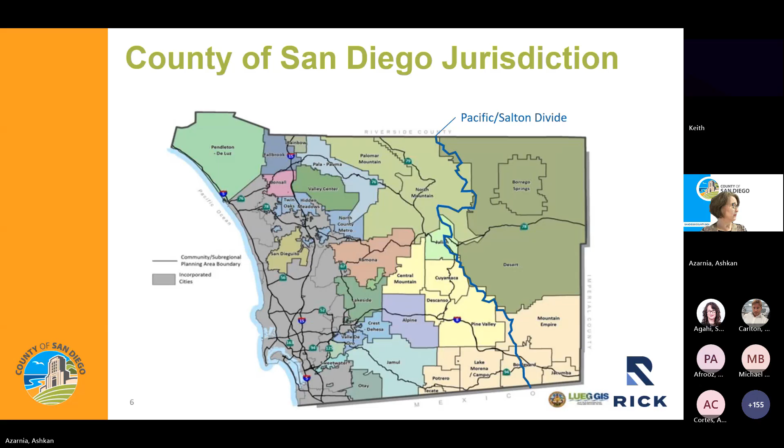Okay. I did want to share a little bit of information about the county board. The county is governed by a 5-member board of supervisors, and the supervisors set priorities, approve the county's operational plan, which is our budget, and set local policy. And the board does appoint commissioners to a flood control district advisory commission, who advises staff on policy, budget. This manual, our commissioners helped review and provided input to this manual.

I want to acknowledge Dr. Mary Yang, the vice president of the Flood Control District Advisory Commission. So thank you for coming, Dr. Yang. The board generally relies on state and federal law to guide flood-related water policy, although the board has adopted

some provisions with respect to private land development projects in mapped floodplains, which are more stringent than the federal minimum. So one example is the 1-foot freeboard. To be clear, the county applies these provisions to our own capital improvement projects as well. So these are the requirements that would govern all development in the unincorporated area, whether that be public or private.

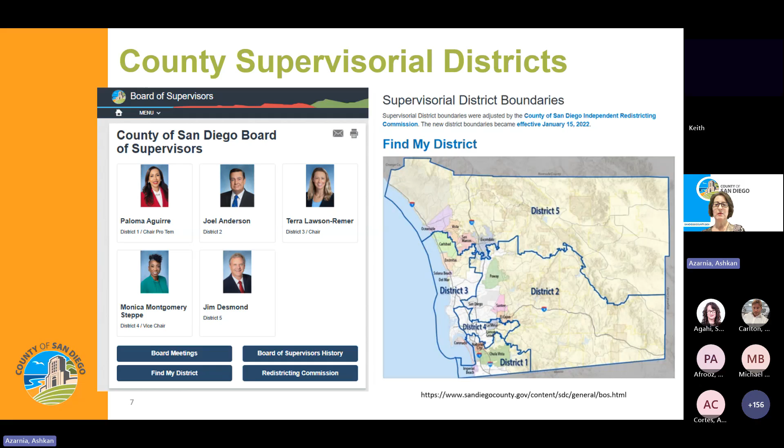I start many of my presentations like this. How many of you are from San Diego originally? Okay, well, first of all, you're all spoiled. As someone who is not from San Diego, let me tell you, you live a very privileged life. I'm from the Midwest. I'm from Chicago, and it has a very different climate and weather regime. And when I moved to San Diego, knowing nothing about San Diego's climate and weather, I thought, oh, there's really no flooding problems here. This was over 20 years ago.

With our average of 266 sunny days in a year in San Diego, it's easy to forget about flooding. Not so easy in the last couple of years. We had some pretty dramatic reminders. But it's important to know that the flood risk is quite large, and that's what's driving these regulations, is the protection of, most importantly, people, but also structures, the environment, infrastructure.

1 in 5 Californians and over $580 billion worth of infrastructure are vulnerable in the state of California to flooding. So this includes transportation, energy, water supply, sewer networks. All of these are at risk of disruption due to flooding.

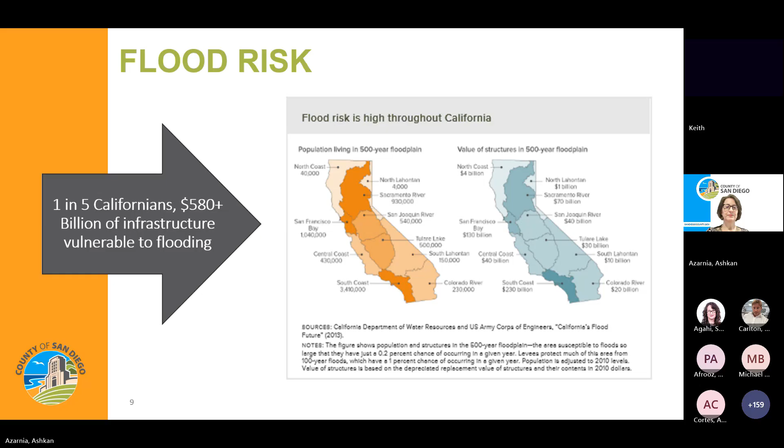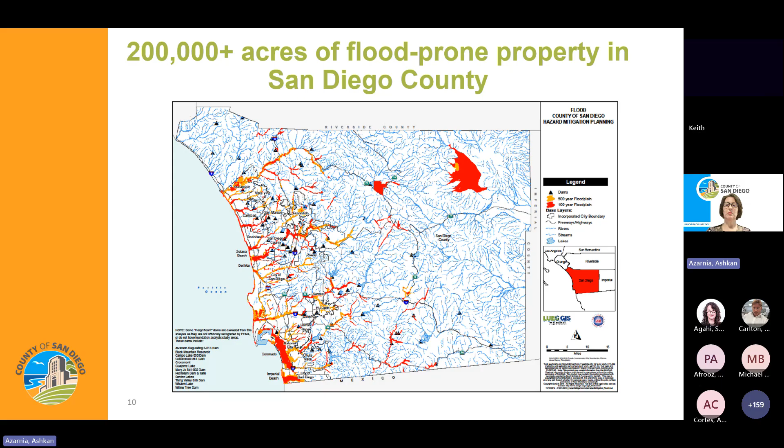So the purpose of that was to set the stage of why this is important. And how many of you are from a city or a county or do work on behalf of cities or counties? Okay, that's quite a lot of people here. We often, and I work for the County of San Diego, we are often questioned by private developers: well, why do I have to meet these requirements? My client has lived here for 30 years and they've never seen a flood of this magnitude. So I'm hopeful that this shared with you the reason why we have this standard and why we have the requirements in effect.

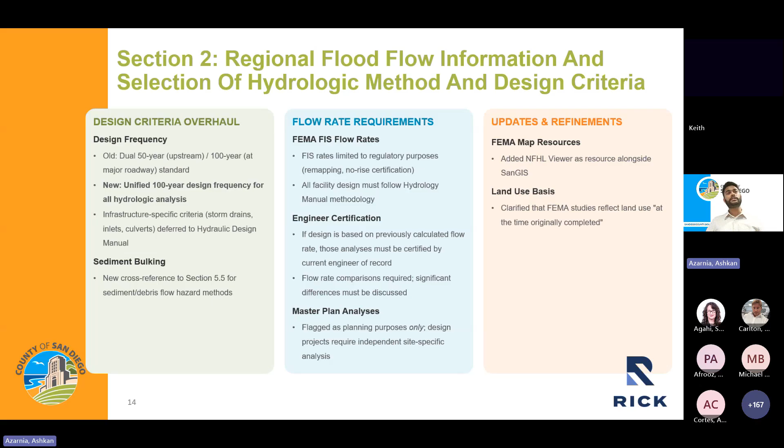And then what did I miss? If an engineer is using a previously calculated flow rate from an old study, they need to have the current engineer of record certify it and compare it to current calculations if they have any. And if there's any big differences, it needs to be explained in their report. Lastly, the master plan study flow rates are flagged to be used for planning purposes only. If you're designing a specific project, you need a site-specific analysis.

Section 3 covers the rational method, the classic Q equal to CIA. The big change here, and this theme repeats throughout the manual, is replacing the old P6 and P24 isopluvial maps and intensity equation with data from NOAA Atlas 14. So those old maps showed the 6-hour and 24-hour precipitation values across the county. They were good for their time, but NOAA Atlas 14 is the modern standard, and it is frankly more accurate with site-specific values. What this means practically, the old intensity formula is gone. It's retired. So in its place, we have a new log-log interpolation method directly from NOAA Atlas 14 data. It's more accurate and more flexible because it's site-specific.

The old intensity duration charts, figures 3.1 and 3.2, are also gone now. And Appendix B now in the manual walks you through how to access NOAA Atlas 14 and get the intensity data that you need. And SD Hydro Tools, the software suite we're going to have a dedicated session on later today, also has a dedicated module to automate this calculation.

There's also an important clarification in Table 3.1, which lists the runoff coefficients by land use. The update makes it clear that those impervious percentages in the table are for planning level studies only. If you're actually designing a stormwater conveyance system or doing project level study, you need to use the actual impervious percentage of that specific site. So use the real numbers instead of just making an assumption.

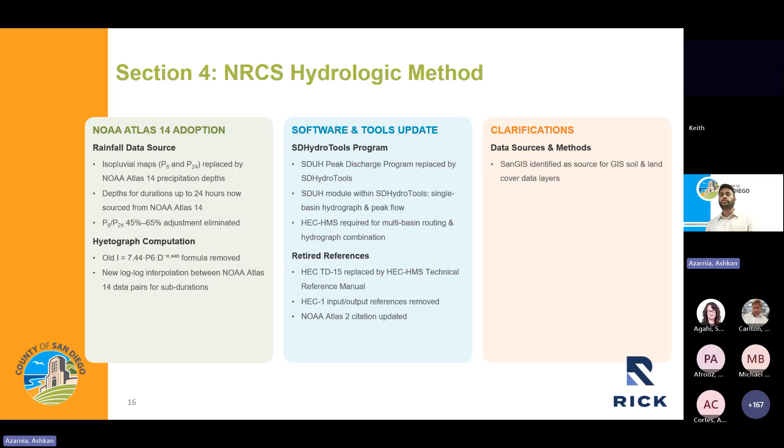On the software side, the SDUH, San Diego Unit Hydrograph peak discharge program, is being replaced with SD Hydro Tools. Within SD Hydro Tools, there will be a dedicated module for San Diego Unit Hydrograph, which handles the single basin hydrographs and peak flow calculations. But when you need to route flows through multiple basins and combine hydrographs, which is the more complex scenario, HEC-HMS can be used, and it's the required software. Technical references throughout section 4 have also been updated. Old HEC TD-15 reference is being replaced with HEC-HMS technical reference manual, and old NOAA Atlas 2 citation is now NOAA Atlas 14.

Section 5 is on erosion and sedimentation. This one also got some serious updates. There's a brand new topic here that I think a lot of people will find relevant, sediment bulking, and there's a dedicated session on this later in the presentation. But I'd like just to give an overview of what it is.

So sediment bulking: imagine a flash flood coming down a channel, and it carries not just water, but also sand, gravel, debris. So that extra solid material mixed in with the water is called bulking. And that flow, that's about 30% sediment by volume, can behave very differently compared to just water for the same discharge rate.

So back in 2020, a technical advisory subcommittee was formed to study this phenomenon and make recommendations. They commissioned River Focus to do a comprehensive study, and that study was completed in October 2022. It drew on practices from Southern California counties and the latest research. The result is there's new guidance now on sediment bulking under two conditions: normal design condition and post-fire situations. John's going to get into that in more detail later in the presentation. There's also sample workbook problems on how to calculate sediment bulking.

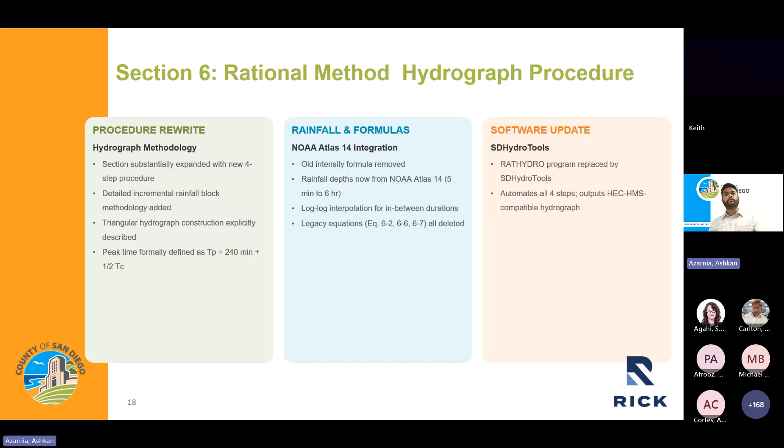Some of you might know this, the old RatHydro program that you can find on the county's website is being replaced with the SD Hydro Tools software. The new tool automates the 4-step hydrograph procedure and gives you a hydrograph that is fully compatible with HEC-HMS.

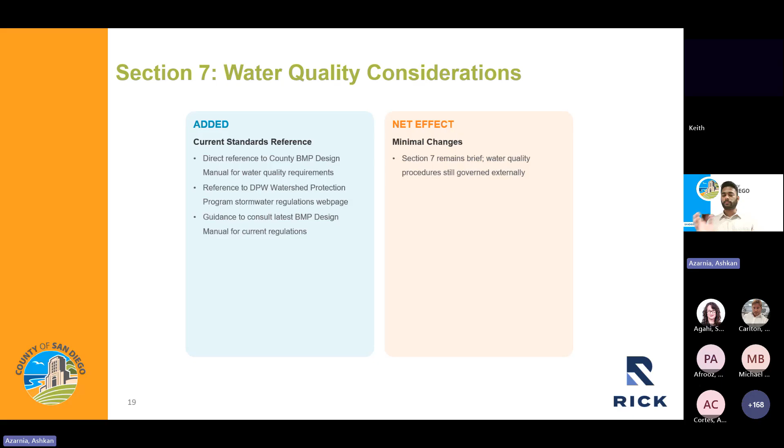Section 7 is the shortest section in the manual. It's about the water quality considerations. The change here is pretty minimal. The new version simply directs you to the county's BMP design manual for any water quality requirements. Side note, all local agencies have their own BMP design manual, so please make sure that you're using the right one.

Besides all the section updates, we also have workbooks which have sample problems. They've all been updated to reflect the shift to NOAA Atlas 14 and the transition to HEC-HMS from HEC-1. There's also a new sample problem on sediment bulking calculations. The support sections have been updated as well. Acronyms, glossary, acknowledgements, new figures, they've all been updated.

And before I wrap up and turn it over to Laura for the next session, let me give you a 30-second summary on what really drove this update. One is NOAA Atlas 14. This is the single biggest change that's going to touch every hydrologic method in the manual. Basically, site-specific rainfall data replacing the old intensity equation.

And two, SD Hydro Tools, brand new software that is designed specifically for San Diego County, replacing multiple older standalone programs. So it makes the workflow faster and more consistent. And three, sediment bulking. For the first time, we have formal guidance on how to account for sediment and debris in flood flows. That brings us to the end of the section by section walkthrough.

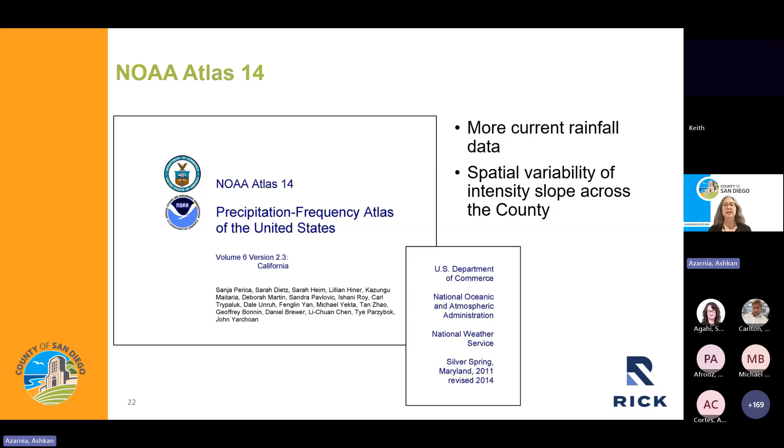So with this, after more than 40 years of service, we're sending off the intensity equation to retirement and wishing it happy trails and moving on to a new procedure. The rainfall depths and the rainfall intensity, instead of the isopluvial maps and the equation that we had in our 2003 manual, we will now be obtaining those rainfall depths and rainfall intensities from NOAA Atlas 14. And this is published through NOAA's website on a precipitation frequency data server.

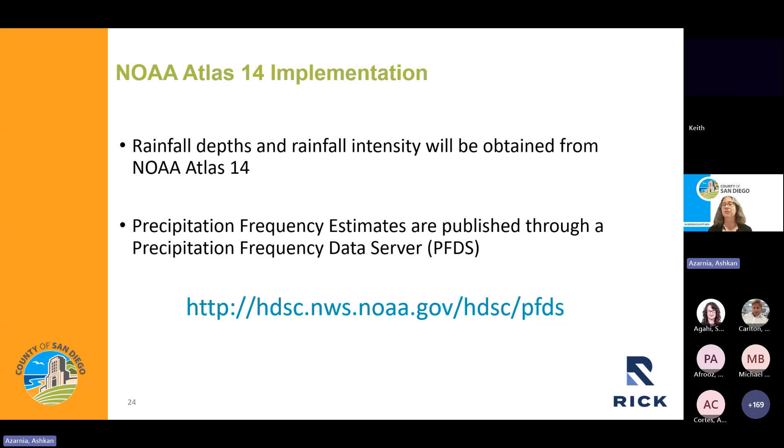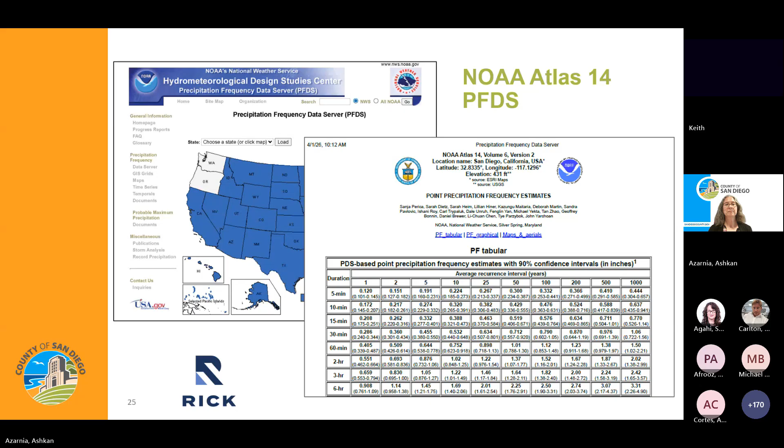This is the website shown here. Here's a snapshot of what it looks like. I think probably many of you have already visited this and seen this. The online precipitation frequency data server interface is going to be the primary source for obtaining the data. However, you might want to be aware of some backup options just in case you're ever offline, if you have an internet outage, or if NOAA has an outage for a little bit.

For those of you that use GIS and keep a library of GIS data on your own server, you can actually download the NOAA Atlas 14 data grids that are the basis of the PFDS interface, and you can store them in your own library. In addition, a copy of the 100-year data grid is embedded within the SD Hydro Tools program. So you can obtain 100-year rainfall data from SD Hydro Tools. So if you ever can't access the NOAA Atlas 14 website, you'll have that backup in SD Hydro Tools.

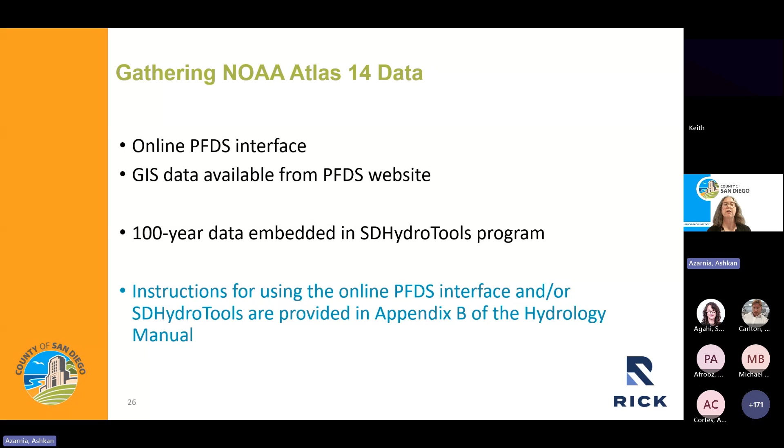So with this, we've removed the isopluvial maps from Appendix B of the hydrology manual and replaced that with instructions for how to use the online PFDS interface and/or how to use SD Hydro Tools to obtain the data.

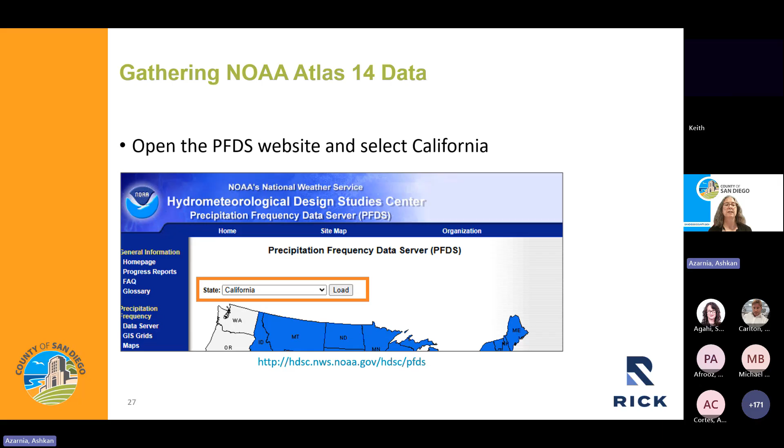So when gathering the NOAA Atlas 14 data straight off the website, first we open the website and select the state of California. Then we select the data type and the units and the time series type. Now the data type could be inches or it could be inches per hour, depending on what type of calculations you're working on. I'd recommend just downloading both versions, one in inches and one in inches per hour, for your project. We set this to English units, and set the time series type to partial duration series.

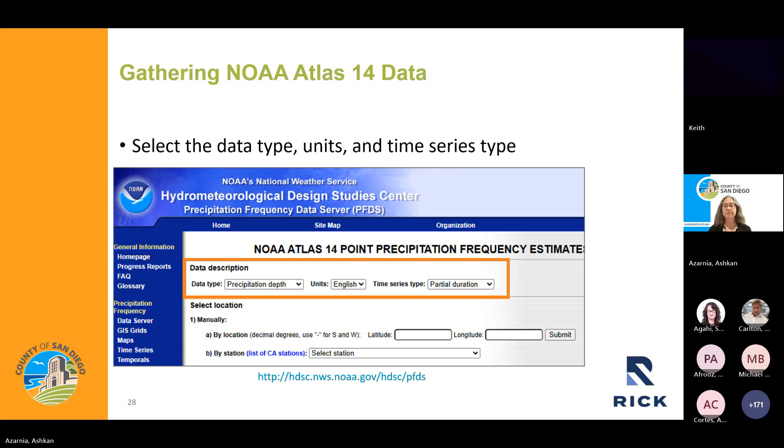You can use any of the available options for selecting the location where you'd like to get the data. And then print the data so that you can store a copy of that data in your project file. Once you've printed data for your project, you won't need to revisit the server to look at the data. You'll have that copy stored for your project, and you can include a copy of that data in your drainage study report.

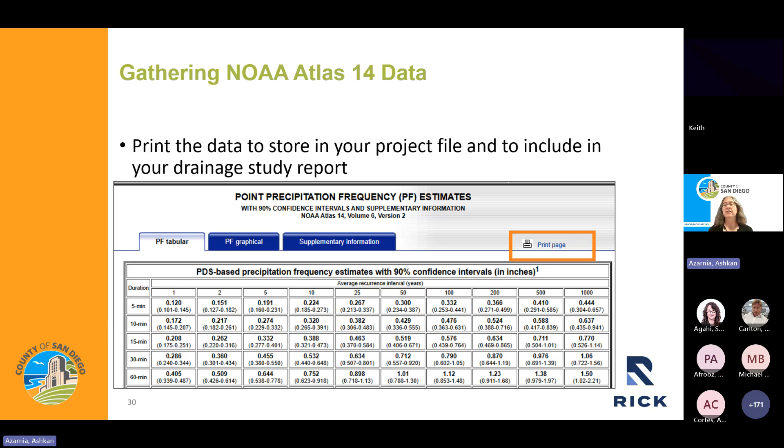So when gathering the data, we're looking to gather the data specific to each project or study that we're working on. If it's a small project with a rational method analysis, a small watershed, you probably would select the project location as the location to get the data. For NRCS hydrology or larger watersheds, we usually select the watershed centroid, which may be off-site from the actual project.

So it's really important to keep track of the latitude and longitude for the selected location when you select your data. As long as you record that latitude and longitude, you'll always be able to reproduce the exact same data from going to the website. So it's really important to just keep track of that latitude and longitude, especially when it's offsite from the project.

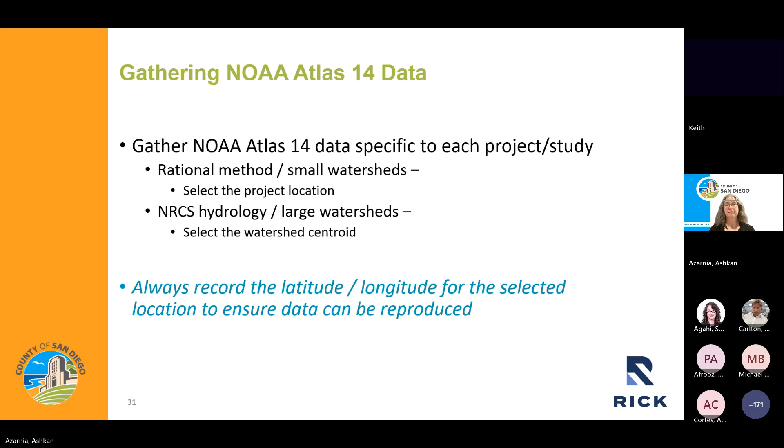So now we'll talk about how to use the data. The data that we're getting from NOAA Atlas 14 is being given to us in time-intensity pairs or time-depth pairs. And we'll want to pay attention to which units we're working in, whether it's inches or inches per hour, because you can download both of those. So depending on what computations you're using, you'll either need your data in terms of time versus inches or time versus inches per hour.

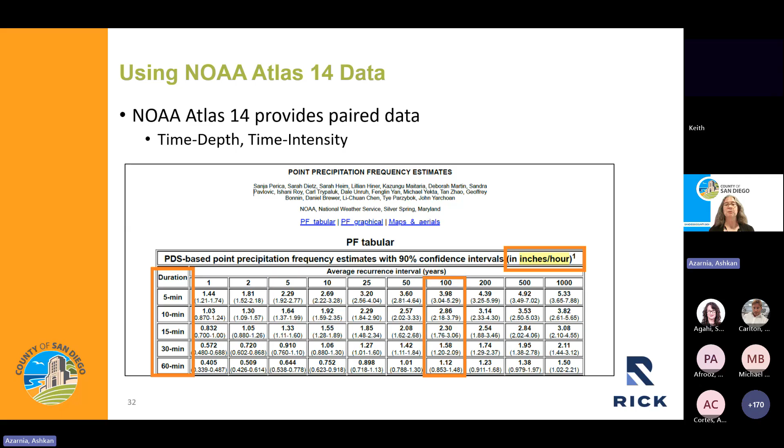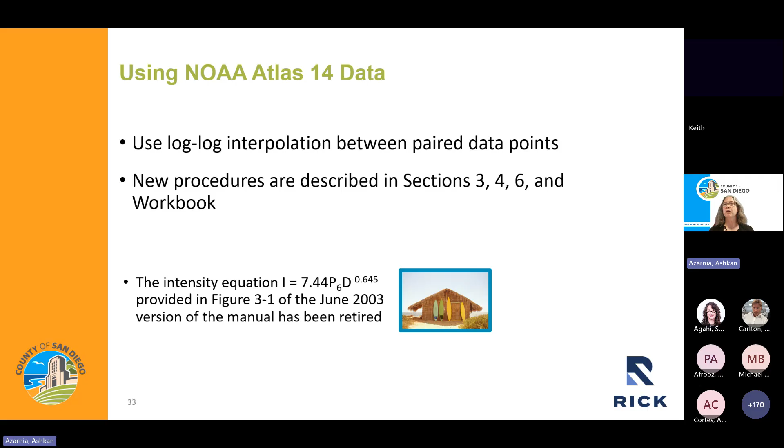For times that are in between the given data pairs, for example, maybe you have a rational method time of concentration of 7 minutes, which is in between your 5-minute and your 10-minute data that you get from NOAA Atlas 14, then we use log-log interpolation between the given data pairs. So just as a reminder, we're not entering the P6 into the intensity equation. Instead, what we're switching to is the log-log interpolation between paired data points. So we have new procedures for this written up in sections 3, 4, and 6, and the workbook of the hydrology manual.

The equations for log-log interpolation are provided in section 3. There are 3 forms of the equation provided. All 3 forms of the equation produce the same results, and I invite you to test that and prove it to yourself. It's provided in 3 forms because different engineers visualize equations in different ways. So these are just 3 different visualizations of the log-log interpolation equation.

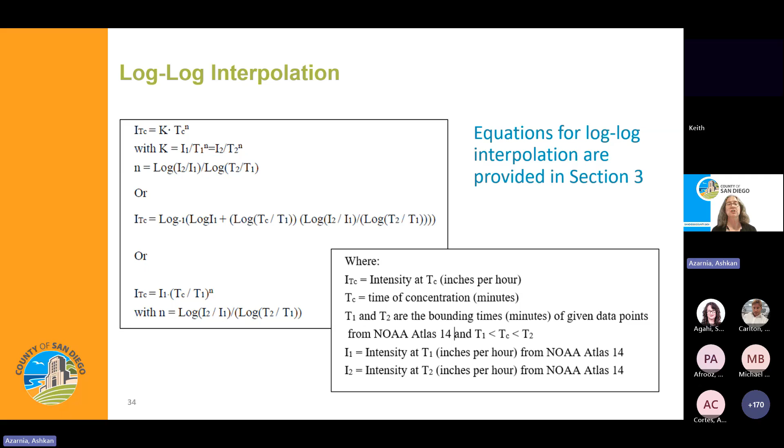In addition, the new SD Hydro Tools program provides an interpolation tool that you can use like a calculator where you can punch in the time that you're interested in and get an interpolated rainfall depth and intensity.

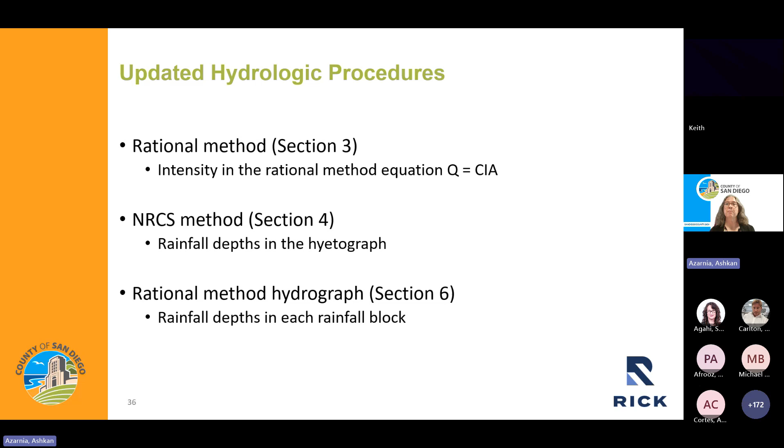So this switch to NOAA Atlas 14 applies in a couple of different procedures throughout the manual. It applies to the intensity in the rational method equation Q equals CIA. In section 4, where we have the NRCS hydrologic method, it applies to the rainfall depths that go into the hyetograph. And in section 6, it applies to the rainfall depths that are in each rainfall block in the construction of a rational method hydrograph.

Because of the change, we did retire RAT Hydro and San Diego Unit Hydrograph, or SDUH, because those programs have been built on the intensity equation. So RAT Hydro is now replaced with a module within SD Hydro Tools called Rick RAT Hydro. And SDUH is replaced with a module that's also called San Diego Unit Hydrograph. SD Hydro Tools also adds a new module, something that there wasn't a legacy program for, but a module that creates a rainfall hyetograph for the NRCS studies.

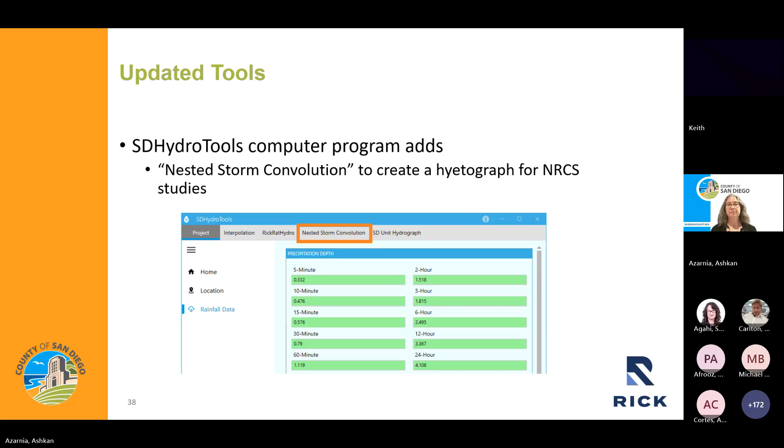All of the example problems in the hydrology manual workbook have been updated to reflect the NOAA Atlas 14 intensity input to give an example to follow as practice for how to apply this in the different procedures of rational method and NRCS hydrologic method and rational method hydrograph.

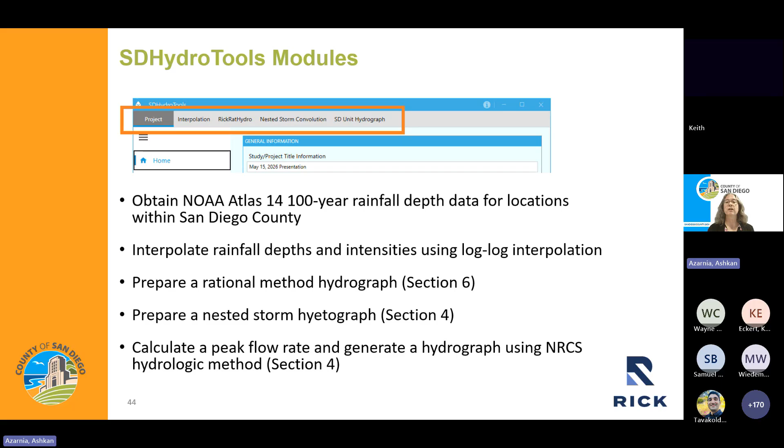Here's the snapshot of the front page of the SD Hydro Tools program. This program includes 5 different modules, which are shown across the top of the program, and we're going to go over each one of these modules in this discussion. But first, where will you get it? The program and the user instructions will be provided on the County of San Diego Hydrology Manual website. This is not an online application. You will download the program and install it on your local machine. And also with it, please download the user instructions.

User instructions are going to discuss how to install the program, provide you with an overview of the program layout and how it has the different modules and different tabs and windows within each module. It has really important information about how to get started, the required input and actions to initiate those program modules. Then for each of the modules, there's a description and a purpose of the module and information on how to use the module and how to export the results.

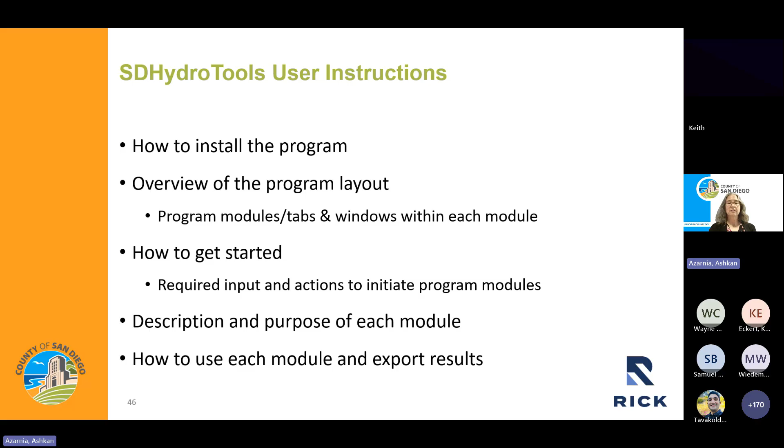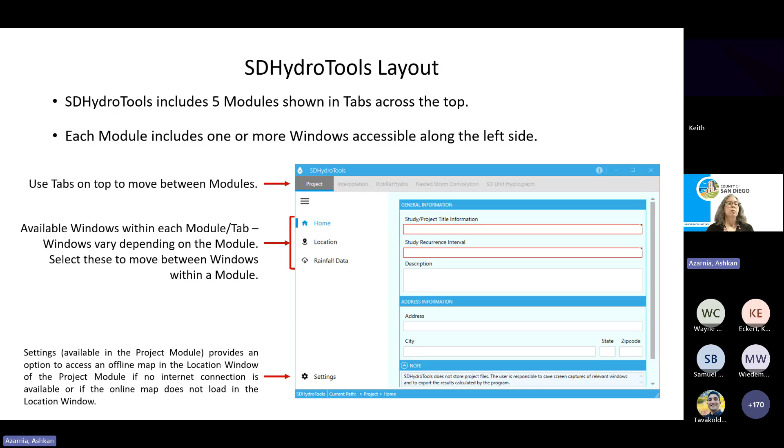All these slides that you see that have a white background are straight out of the user instructions. So this is what the user instructions for SD Hydro Tools will look like. As I said, it will give you some information about the Hydro Tools layout, where the different modules are shown in the tabs across the top. And then each one of those modules, depending on what's needed within it, may have different windows, which are shown along the left-hand side.

Anytime you're starting a new project and you open SD Hydro Tools, only the project module is actually active when you first open the program. In order to activate the other modules, the first step is to populate the rainfall data in the rainfall data window, because the program modules can't execute without rainfall data, so this is a required action. These other modules will be grayed out, and the first thing you have to do is put in the rainfall data.

So to get that embedded 100-year rainfall data, we need to select a location, which can be selected either by scrolling on the map and dropping a pin on the map, or by entering a desired latitude and longitude.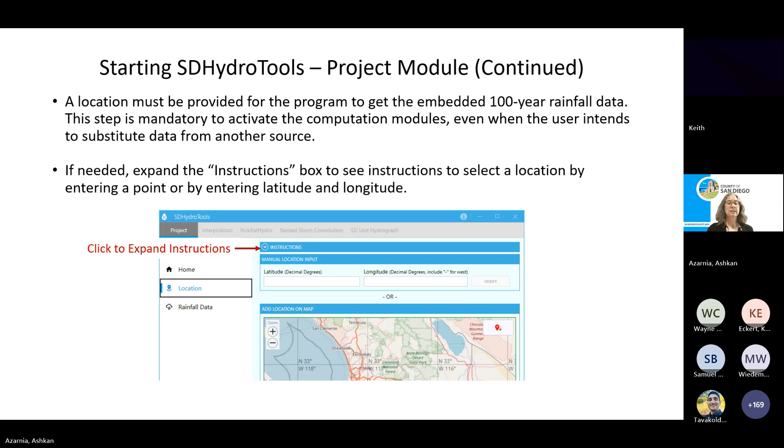Once a valid location has been entered using either of those methods, either the latitude and longitude or the map, then the button on the bottom that says Get Data will become active. It does need to be a valid location, meaning a location that's within San Diego County. The grid of data that is embedded in SD Hydro Tools is only a county-wide grid. So if you selected outside of the county, it wouldn't be able to find data. So make sure to select something that's within San Diego County, and then the Get Data button will become active, and you'll click that, and the program will pull up the data for your project.

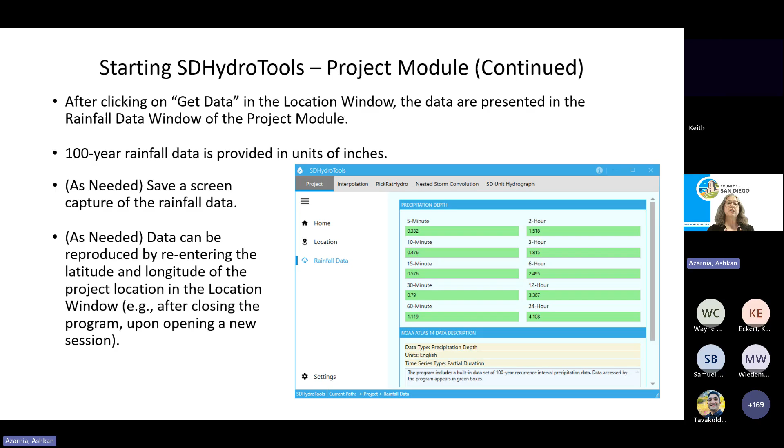So after it pulls up the data, it will take you to the rainfall data window, and it will show you the data. At this point, once it's been populated by the program, this data is showing to you in green boxes in the program. This is the actual data that will match exactly. If you entered the same exact latitude and longitude in the online server, it will match up exactly because this is the same grid that's in the online server.

Here at this point is your opportunity. If you are preparing a 50-year study or a 10-year study, you can overwrite this data in this program. It's just that you would have to go obtain that data from the online server and then manually type it into the program, because the program just has the 100-year data embedded. And that 100-year data is embedded because 100 year is the design storm for most studies in the county, but sometimes you need to estimate a 50-year or a different event. You have the opportunity to just overwrite this data. If you overwrite it, the box will change color to indicate that the data is user entered.

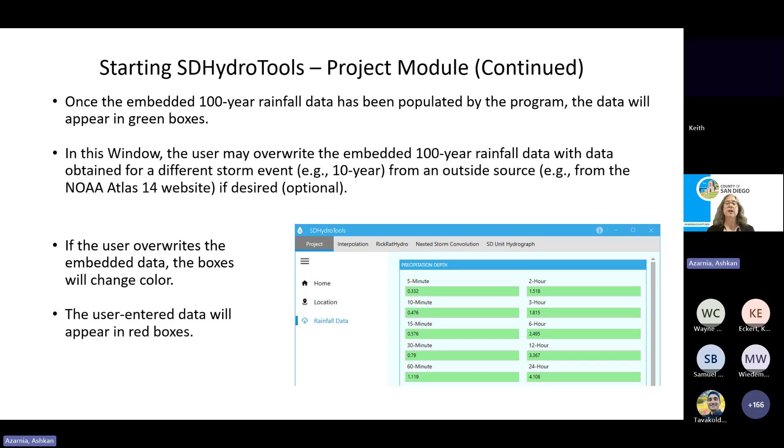So once that rainfall is populated in the program, all of the other tabs become active. So now they're not grayed out. Now you can grab any of the other modules that you want to use. So you can select a tab for a desired module. It is not required to use all of the modules in a session. You can use all of the modules in a session. This is your choice. There's no particular order that you have to go through them. So which modules you use just depends on what you're doing for your project. Maybe you have a rational method, and so you need some interpolation for times of concentration, maybe a rational method hydrograph. If you're doing a larger watershed analysis, maybe you skip straight to the SD unit hydrograph module.

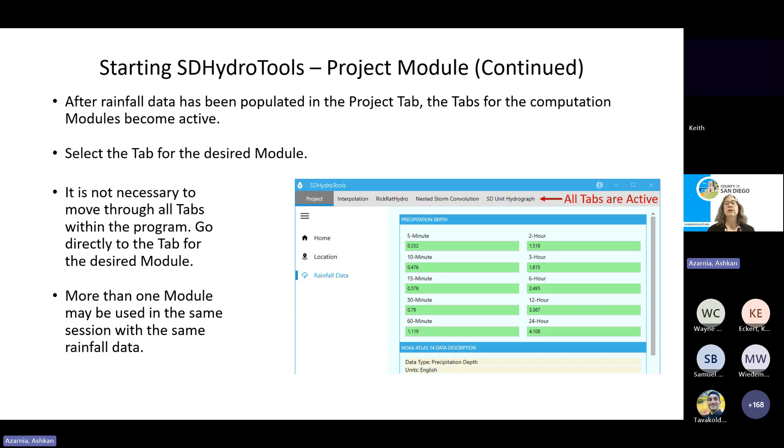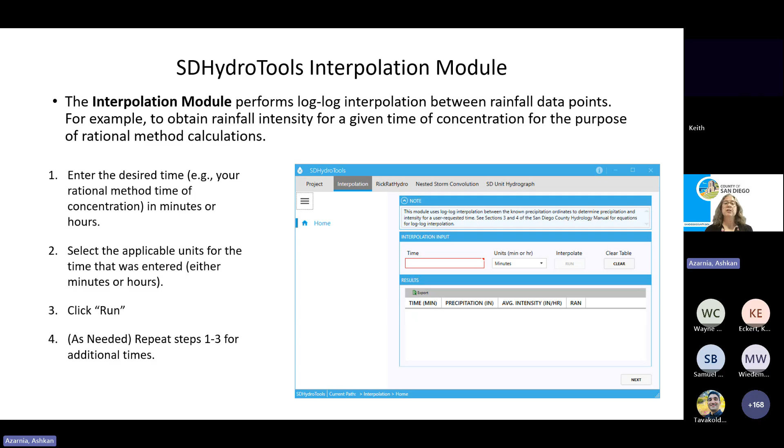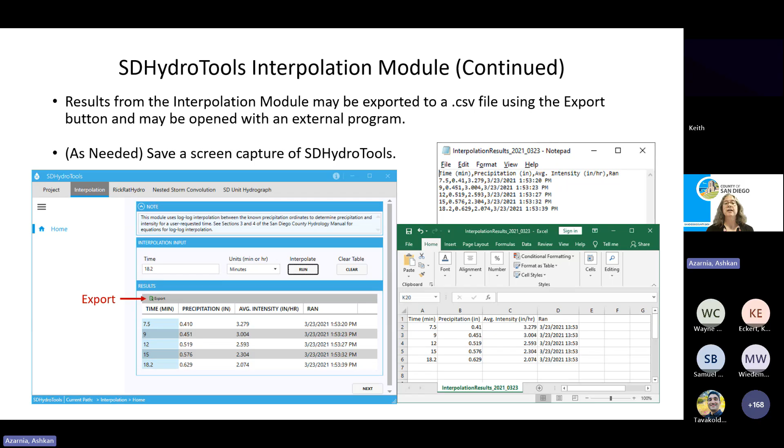So now I'm going to walk through each of the modules and just tell you what's in there, what's available to you. The interpolation module is a calculator that performs log-log interpolation. So this would most commonly be used probably to interpolate the intensity for a given time of concentration for a rational method study. It uses one of the equations that's presented in section 3 of the hydrology manual. So you enter the desired time, for example, your rational method time of concentration, set the units of whether you're looking for minutes or hours, click run as many times as you need to do it, and you'll just get an interpolated result. Then that data can be exported. If you'd like to save it, you can click an export button and get a file, a comma separated values file, which you can open in a text editor or you can open in Excel.

Next up is the RickRatHydro module. This is the one that replaces the 2003 RAT Hydro program. Because we've changed our procedure for intensity to NOAA Atlas 14, we're not going to expect the results from RickRatHydro to match results from the old RAT Hydro program, because the intensity is calculated differently in the new program. The results from RickRatHydro can be exported to use in another program to perform routing analyses for a detention basin routing analysis. You can take out those results and import them to HMS in order to prepare routing calculations.

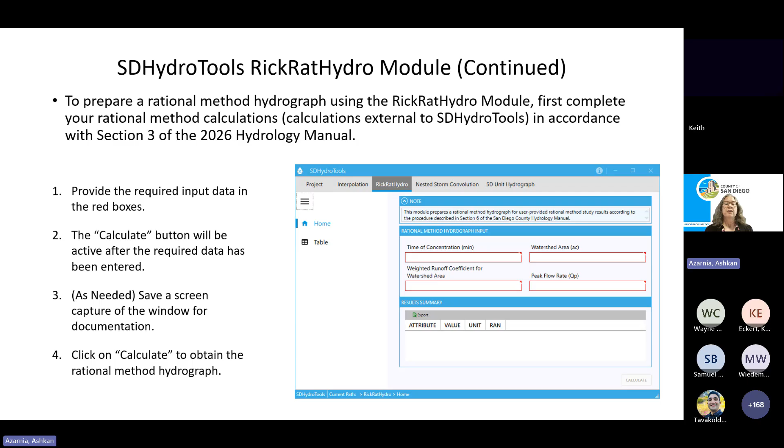So to prepare a rational method, first complete your rational method calculations, which are calculations external to Hydro Tools, and you'll get your time of concentration, your watershed area, your weighted runoff coefficient, and your peak flow rate. Those are the required input data that you'll put in these red boxes. Once you've entered the data, then the calculate button will become active.

Here is some example data entered into the program for the rational method hydrograph. Now at this point, I want to point out that the program will not judge your data. So it's your responsibility to make sure that the data is valid for a rational method hydrograph. With the rainfall, the program will judge whether your location was valid to get data.

But once it comes to these modules, when you're entering your rational method time of concentration and area, et cetera, the program is just going to take what data you give it, and it's not going to review or judge that data. It will simply prepare the computations with that data.

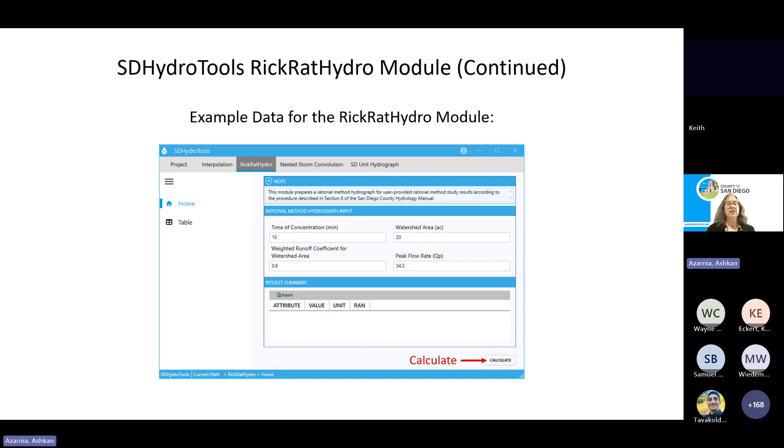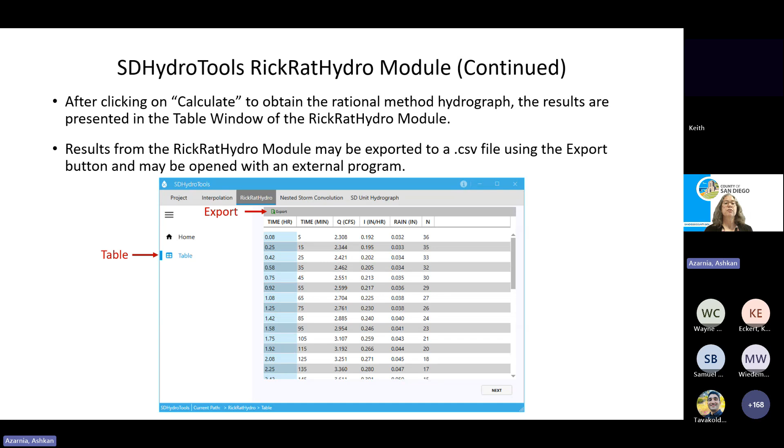Click the calculate button. When you've calculated it, the program will move you to a new window showing a table with the data. You can hit an export button to export that comma-separated values file. Here's an example of what it looks like. You can use it in a text editor. You can pull it up in Excel and arrange it how you need to import it to any other program that you want to use for routing calculations.

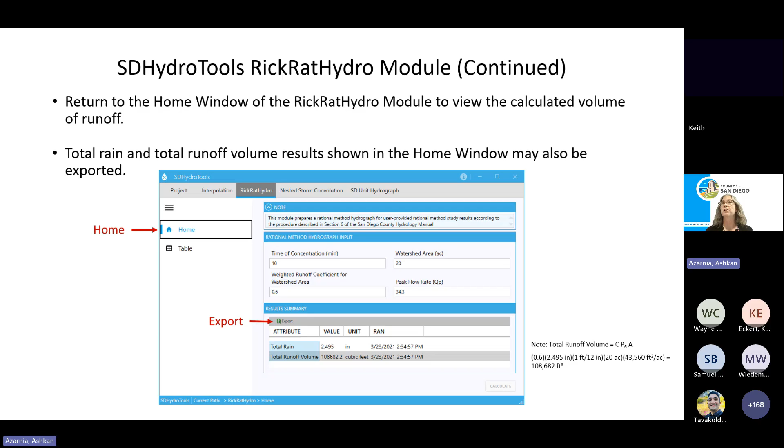In addition, the program automatically moves you into a table window to show that data, but you can also return back to the home window, which shows you what input you had, and it will have calculated your total rainfall and your total runoff volumes. And you can see that the runoff volume equals C times P times A. That concludes the rational method modules.

The next two modules are for the NRCS hydrologic method. First, we've prepared a module called Nested Storm Convolution. This module did not have an equivalent program provided with the 2003 hydrology manual, although what it is doing is preparing a nested storm hyetograph just as described in section 4 of the hydrology manual. The hyetograph is the rainfall input that you put in for an NRCS hydrology calculation.

This program also automatically applies a rainfall depth area adjustment, just as described in the hydrology manual. However, this module is only preparing a hyetograph. So if you want no adjustment, you can enter 0 for the watershed area, because we're not trying to calculate a peak flow rate from an area with this module. So you can manipulate that watershed area if you don't want any depth area reduction applied to your rainfall hyetograph.

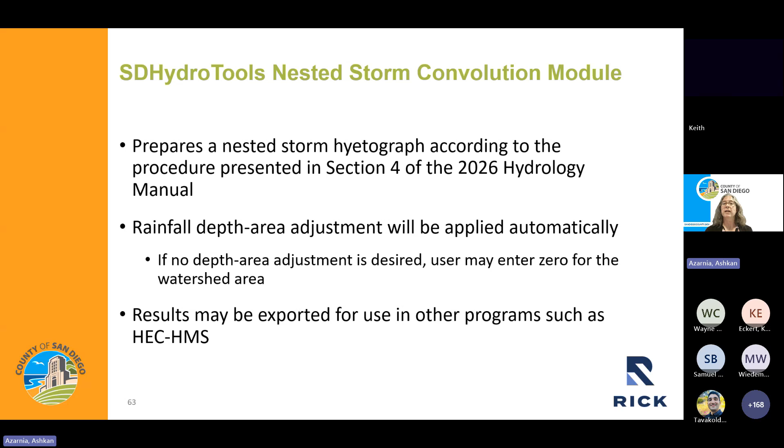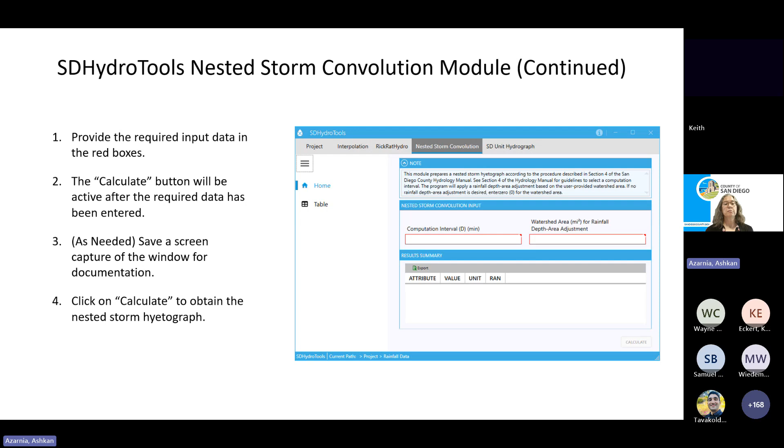So you provide the required input data, the computation interval for your hyetograph, which might be 5 minutes, 10 minutes, 15 minutes. That depends on the size of your watershed. Follow the guidance in section 4 for determining an appropriate computation interval for your watershed. And then you can enter the watershed area or enter a 0 if you don't want the rainfall adjusted. So here it is with the data entered, and click calculate to get the results.

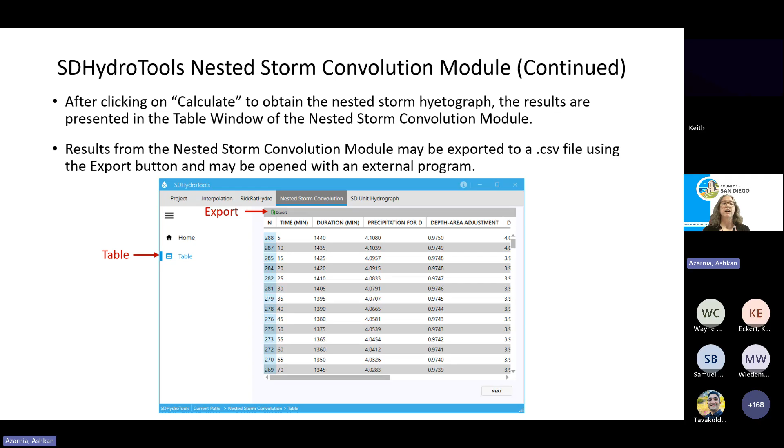The program then moves into a table window showing you the calculated results, which you can export to the comma-separated values file. There's the comma-separated values file. And then you can return to the home window and see the total rainfall found for the hyetograph, and the area adjusted rainfall depth once the depth area adjustment had been applied.

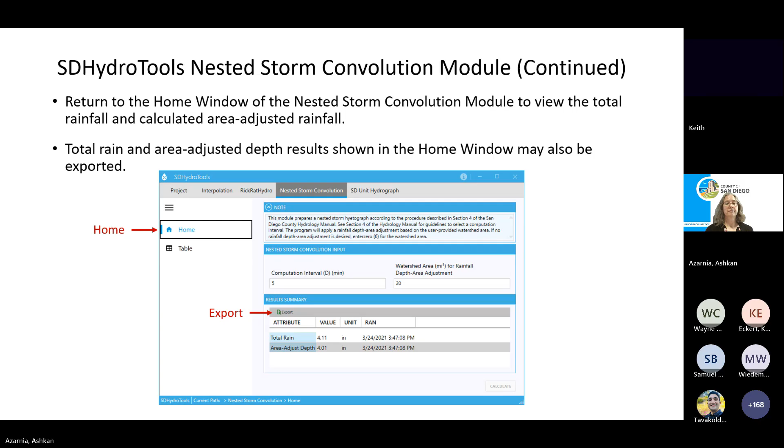The last module is the San Diego Unit Hydrograph module. This is the one that replaces the SDUH software. The change again is related to the rainfall intensity. No other changes to how we prepare a large watershed hydrology study, just the method we use for the rainfall intensity. Because of the switch to NOAA Atlas 14, we will not expect results from the SD unit hydrograph module to match results from the SDUH module because they're calculating intensity differently.

In this module, it's going to apply a rainfall depth area adjustment automatically based on the watershed area that you input. And in this case, we would not try to get around that by putting in a watershed area of 0, because in this module, we're calculating a peak flow rate. So we need to know the total area that the rainfall is landing on in order to calculate that peak flow rate.

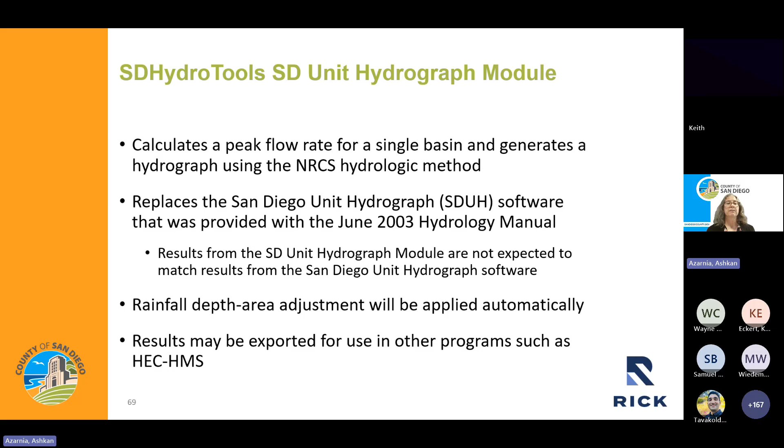So we provide the required input data, which is the computation interval desired, the watershed area, the adjusted curve number for the watershed area, and the watershed Corps lag time. Different programs want different versions of the lag time. If you're using an NRCS study in HEC-HMS, you're putting in the NRCS lag. In this particular program, that conversion is done within the program.

So you calculate the Corps lag using the methods presented in section 4 of the manual. You enter the Corps lag in this program, and the conversion to NRCS lag for the purpose of the computations will be taken care of by the program. So you want to make sure to use the watershed Corps lag time and then select a computation interval appropriate to the watershed size and the Corps lag time.

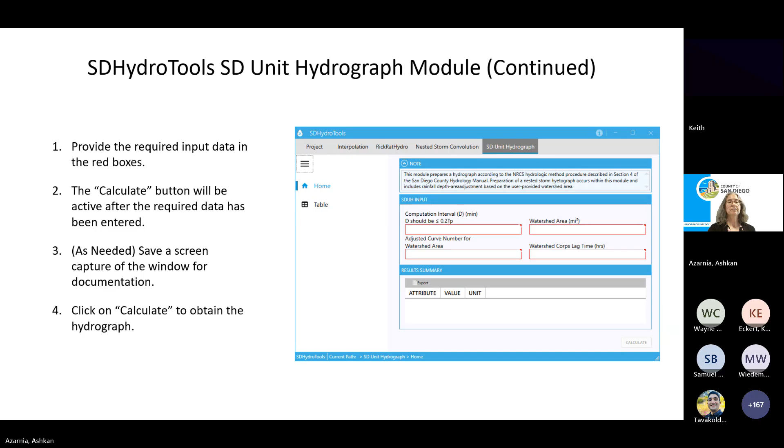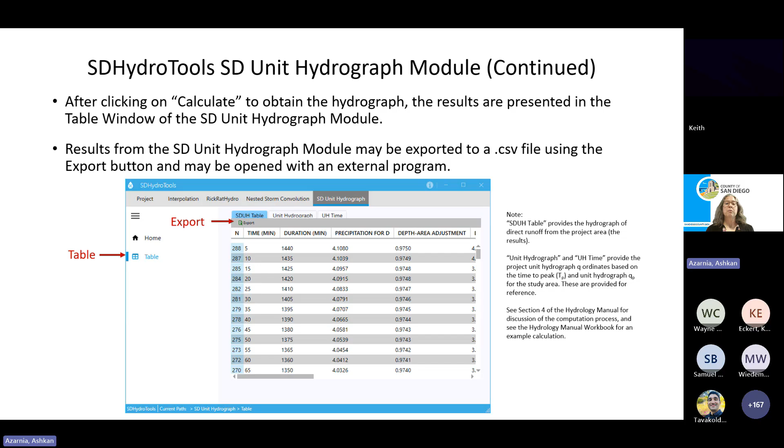Here's a snapshot with some data entered, and the calculate button becomes active. The program moves to the table window to show you all the processes that went into calculating that watershed, and all of this data will be exported, and you'll have your hydrograph ordinates in the far right column of the exported data. This can then be manipulated in Excel to format it how you'd like in order to import it into a program such as HEC-HMS or any other program that you might be using if you're routing or combining hydrographs.

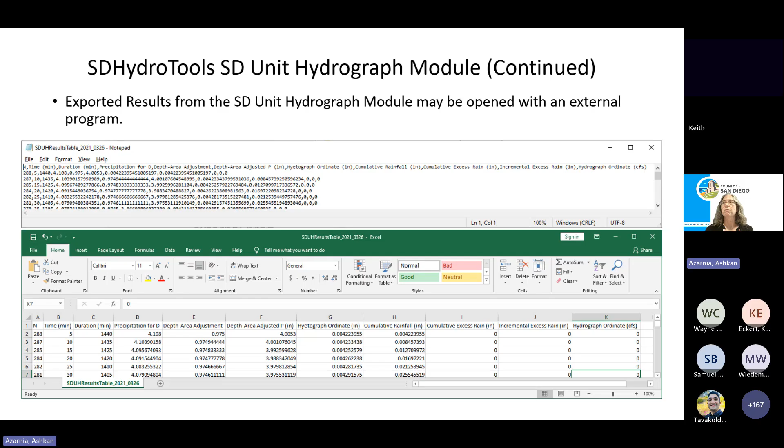Returning back to the home window gives you a summary data. This was designed to look very similar to the SDUH module. So it'll look just like what you used to get from SDUH, a summary of the data that you entered into the program and a peak flow rate.

So one of the differences in the SD unit hydrograph module compared to the 2003 SDUH program: you just got this text output and you just got a peak flow rate. With SD Hydro Tools, we decided to give you the hydrograph because it had to be calculated in order to get the peak flow rate. So we've given you the hydrograph as well. You can export that hydrograph from the table and then export this summary data from the home window, which shows just the summary with the peak flow rate.

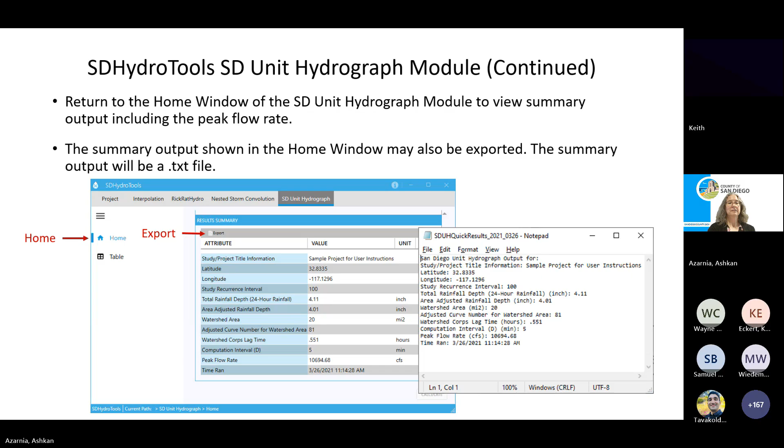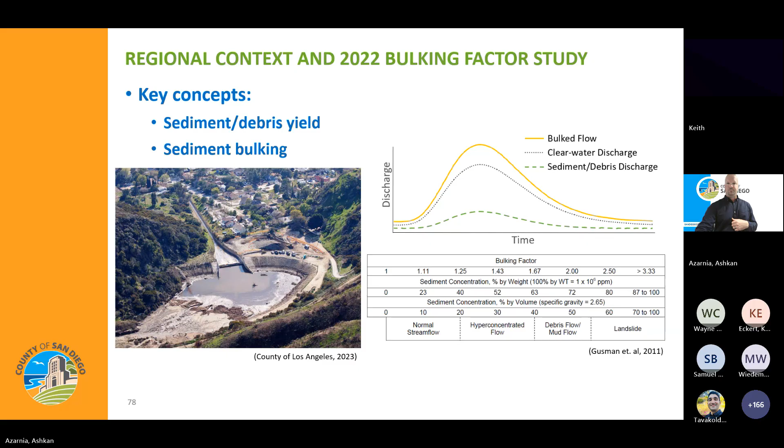So wildfires can dramatically change the hydrologic and sediment response of a watershed to even modest rainstorms. But the degree of the changes is quite sensitive to the size of the watershed. So clear water flows frequently increase following wildfires for a given storm event. And that's due to several altered physical processes that occur during a fire. Generally, those result in reduced losses and also reduced time of concentration. And so as a result, a 10-year rainstorm may produce a 100 or even a 200-year peak flood event if it falls on a recently burned watershed.

And then likewise, sediment and debris yields can also often increase dramatically following a wildfire, due in part to those increased clear water flows, but also due to a loss of erosion resistance in the soil. Also, there's often a large increase in the supply of woody debris to the channels following a fire. And I've seen some studies that have found sediment debris yield increases of 30 to even 100 times the normal volumes after a fire. And again, those numbers can be especially large for very small watersheds.

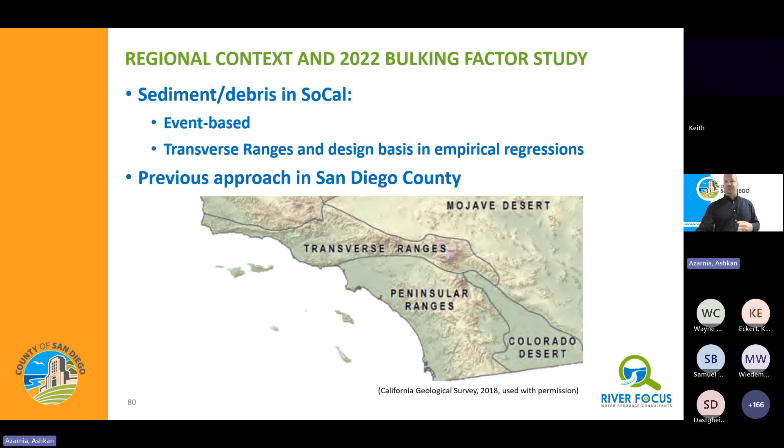So Ash mentioned this earlier, but in 2020, the TAC, the Technical Advisory Committee for the Hydrology Manual, formed a subcommittee that was tasked specifically with providing guidance on estimating sediment and debris yields, determining when and where sediment or debris bulking factors should be applied, and developing appropriate methods for estimating post-fire increases in clear water runoff. And in 2022, River Focus, acting as a subcontractor to RICK, performed a technical study for the county in support of these hydrology updates.

And then in addition to the findings presented in the report, it also presents new methods for sediment debris bulking for 3 different scenarios. So that's bulking for normal design conditions, and then post-fire conditions during what's often called the emergency period, so the first 2 years following a fire, and then post-fire conditions in the period 2 to 10 years after the fire while the watershed continues to recover.

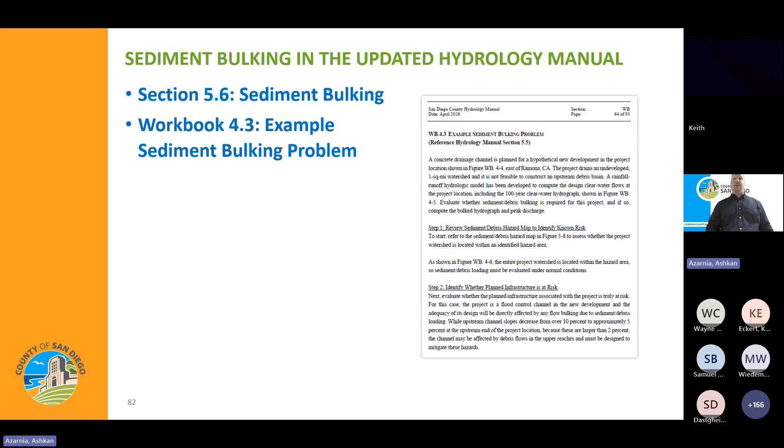So as Ash mentioned, in the updated hydrology manual, sediment bulking appears in 2 new places. So first, there's a new section, section 5.6, which briefly summarizes the sediment bulking guidance, and it refers users to this 2022 study report. And then there's a new workbook, workbook 4.3, which walks through a detailed step-by-step example problem demonstrating how to actually implement the guidance for a selected location. And I'll talk briefly through that example problem in a few slides. So next we'll move on to talk about the new guidance itself.

In California, bulking factors are typically applied to design discharges for facilities with either watersheds in mountainous regions that are subject to periodic wildfire, or arid regions when the facility is located near an alluvial fan. And for San Diego County, what this means is that practically speaking, many drainage basins are not expected to yield enough sediment debris during the 100-year design event to warrant the application of bulking factors under normal conditions. And so based on the new guidance, sediment debris hazards under normal conditions only need to be considered for new flood control infrastructure projects when the project is located within or immediately downstream of a selected area with elevated risk. And then appropriate methodology should be used to plan for sediment loads on a case-by-case basis.

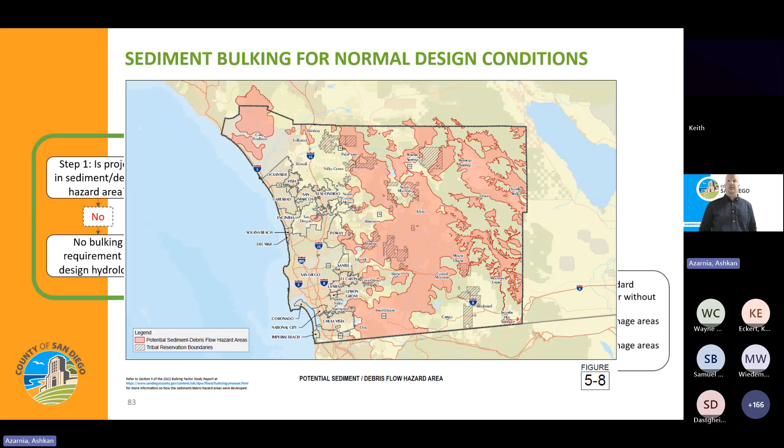So this flow chart summarizes the process for normal conditions. And in step 1, users evaluate whether the project site is located within or immediately downstream of a potential sediment debris hazard region. And a map of these areas is presented in figure 5.8 of the manual. It looks like this. So the red shaded areas are those with assessed elevated debris production hazards and or desert alluvial fans.

So if a new project isn't located within or immediately downstream of one of these red shaded areas, no mitigation is required, no further evaluation is required. And so you could move on. But if it is, then you would proceed to step 2.

So the next recommended step is to evaluate whether the values in question are truly at risk, whether the value is critical, and whether the cost of repair or replacement exceeds the likely cost of the mitigation. And if so, then the next step is for users to confirm with the county whether or not mitigation will actually be required. And this is an important takeaway, I think, of this presentation.

So because the sediment bulking guidance is new for San Diego County, and the impacts of these policies on project cost and feasibility isn't well understood yet, the intention of this review gateway with the county is to provide the county with some flexibility as it tests the real world implications of these new policies. But assuming that the county confirms that the mitigation is required, then users would proceed to step 3.

So generally speaking, sediment debris hazards should be mitigated using one or both of 2 options. So either a sediment debris basin can be constructed, or a bulking factor can be applied to increase the flow magnitude for which the conveyance structures are designed. So first, to avoid or reduce the need for downstream flow bulking, and also when it's actually allowed based on the county's hydromodification and critical coarse sediment yield area regulations, sediment debris basins can be designed at or near canyon outlets and sized with sufficient capacity and the appropriate hydraulics to capture and store the estimated 100-year sediment debris event.

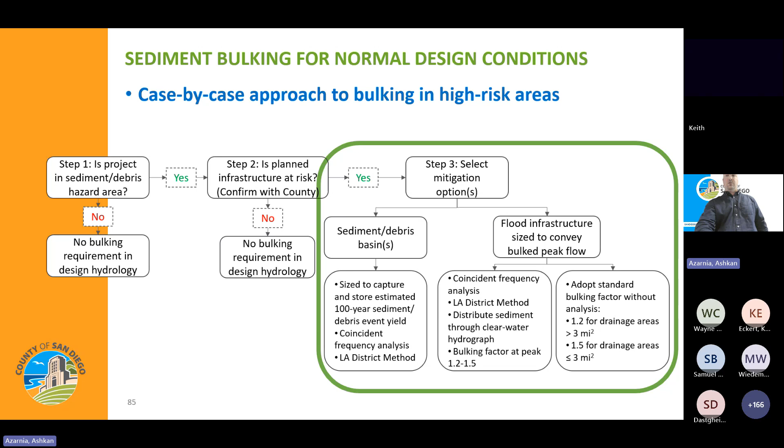And then if preferred, instead of doing the detailed analysis, designers can simply apply a standard bulking factor that's conservative without any additional work. So that would be 1.2 for drainage areas larger than 3 square miles and 1.5 for drainage areas smaller than or equal to 3 square miles.

As I mentioned, fire often dramatically changes sediment and flood risk calculations. So a watershed that has maybe relatively low risk of sediment debris hazards under normal conditions, maybe one that doesn't even require any sort of special analysis under normal conditions based on the recommendations of the study, may pose substantial risks to critical infrastructure after a fire. So as I mentioned before, the effects of wildfire on both clearwater hydrology and also sediment debris loading are typically largest in the first 2 years following a fire, and then they diminish as the watershed recovers.

And there's substantial uncertainty, I'll say, in the methods that are currently available, especially for that initial period, that emergency period. Often the methods themselves are uncertain, and also fewer data are often available immediately following a fire. And this is a very active area of research with evolving best practices. To be honest, some of the best practices have continued to evolve even since we performed this study 4 years ago. So it's quite a quickly changing landscape.

So because of that, we recommend that sediment debris yields and bulking factors assigned during those first 2 years following a fire be determined in consultation with the county or the California Geological Survey's Burned Watersheds Geohazards program. That's a really fantastic program. Some of you may be familiar with it. It's headed by Don Lindsay. It itself is a new program that was founded since this report was done. I think they were founded in 2023, but they're a great resource for this type of analysis. And in lieu of all of that, if you need just a quick assessment, a bulking factor of 2 could often be assumed during this emergency period.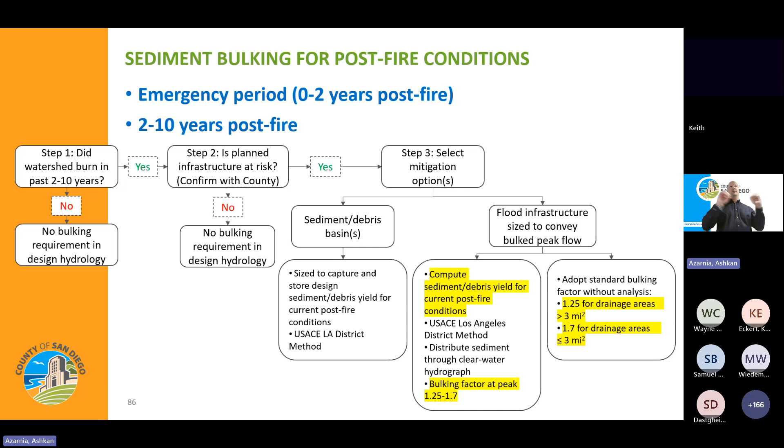So first, planning should be done for the current burn condition rather than for that statistically based 100-year sediment debris event. And then also the bracketing and standard bulking factors are slightly larger for the post-fire case. So the lower end would be 1.25 instead of 1.2, and the upper end would be 1.7 instead of 1.5. And for cases where the project has both recently burned and is located within one of these mapped hazard areas, you would want to compute the yield using both methods and choose the larger of the 2.

All right, so next I'll just very briefly show you the example problem in workbook section 4.3, which considers the case, this is just a purely hypothetical case, but it's a concrete drainage channel planned for a new development east of Ramona. And I won't have time to go through all the steps in detail, but the workbook itself does go through with quite a lot of detail. So I would encourage you to take a look at that.

So in this hypothetical situation, the project drains an undeveloped 1 square mile watershed, and it's not feasible to construct an upstream debris basin. And a rainfall runoff hydrologic model has been developed to compute the clear-water design flows and develop the clear-water hydrograph. And so the task before us is to determine whether or not sediment debris bulking is required for the project or potentially required. And then if so, to compute the bulk hydrograph and peak discharge.

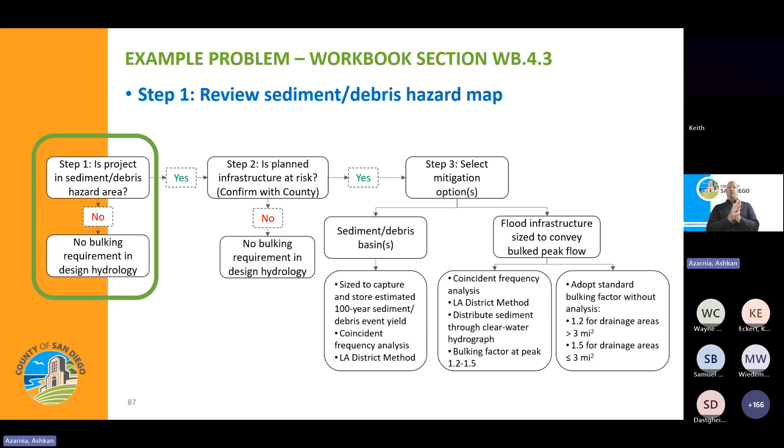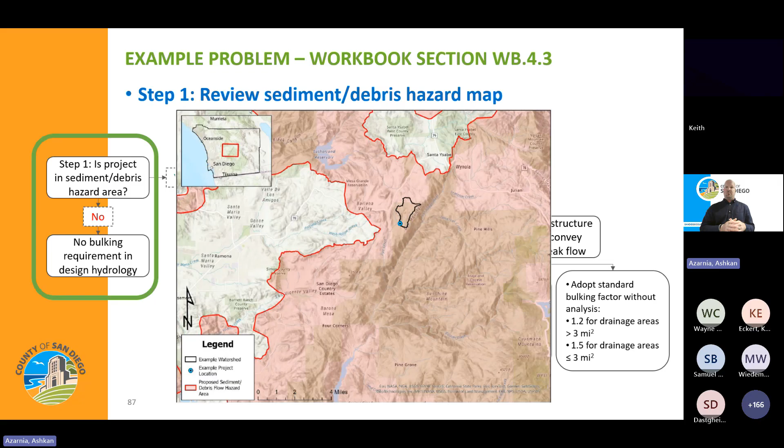So step 1 is to refer to the sediment debris hazard map in figure 5.8. Here's a zoomed in view of it with the project watershed. So you can see the project watershed is located within the hazard area. So sediment debris loading may need to be evaluated for this site under normal conditions.

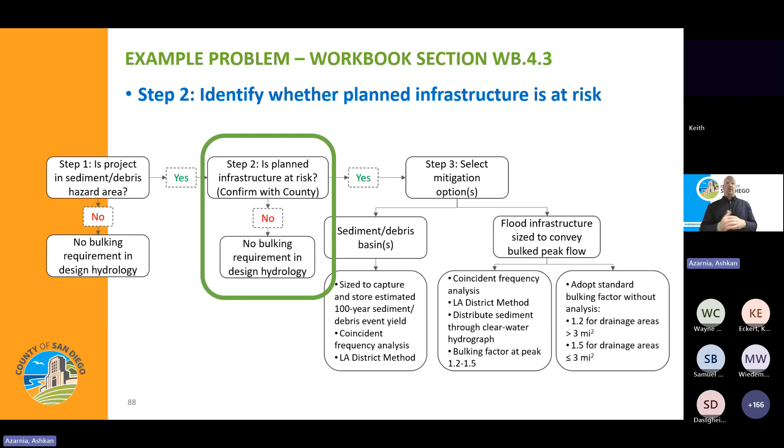Step 2, we evaluate whether the planned infrastructure associated with this project is truly at risk. So for this case, the project is a drainage channel in this new development, and the adequacy of its design will be directly affected by any flow bulking due to sediment debris loading. And also due to the slope of the channel, we assess that any debris flows in the upper reaches of this watershed may affect this channel. So at this point, we check in with the county, we present our assessment to them, and they confirm that indeed the channel must be designed to convey the bulk flow. This would not be much of an example problem if they hadn't.

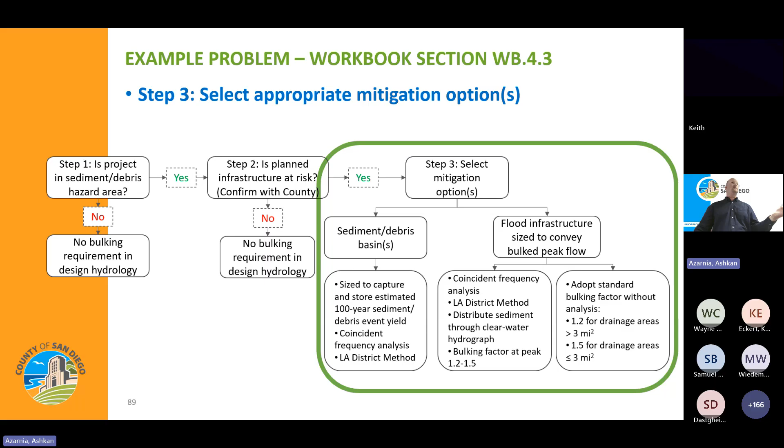So for step 3, we identify the appropriate mitigation option or options. So for the example, based on the information that was given, it apparently isn't feasible to construct an upstream debris basin to reduce the sediment debris loading at the project location. So the design flow used to design the channel needs to be bulked. And so this can be done in one of 2 ways, like we talked about. So either we can estimate the sediment debris yield and distribute it through the hydrograph, or we can apply a standard bulking factor.

So like I said, we don't have time to go through all the steps of the coincident frequency analysis here, but we can imagine that we've developed independent frequency curves for both the fire and precipitation at this site. We've applied the LA District debris method, and we've used SSP to develop a frequency curve for the unit sediment debris yield for this watershed. So that's this curve on the left side. And that point indicates the 100-year unit sediment debris yield. So we pull that off of the curve.

We multiply it by the watershed area and also a correction factor that's appropriate for this watershed. And then the result is the 100-year sediment debris yield. And then that volume of material is distributed through the clear-water hydrograph previously developed using an HEC-HMS model. And it results in the bulk hydrograph shown on the right. And if you do the math at the peak, the computed bulking factor is 1.15 for this example problem, which is slightly lower than the minimum 1.2.

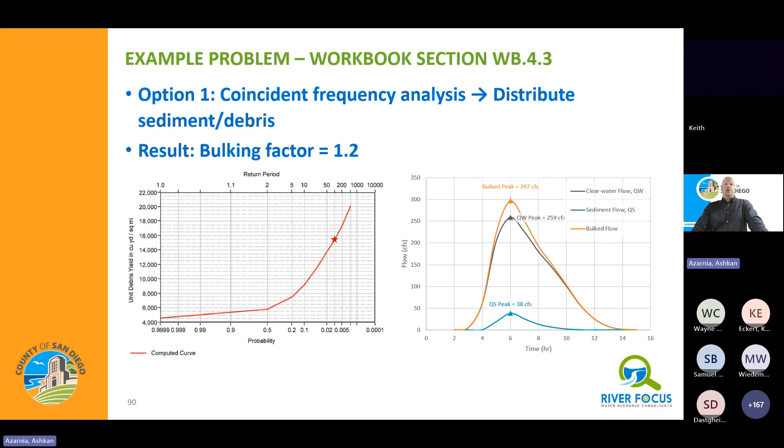So for this option, option 1, a bulking factor of 1.2 can be applied. And then alternatively, in lieu of doing all of that, designers could opt to just use a standard conservative bulking factor. And in this case, because the watershed area is smaller than 3 square miles, it's just about a 1 square mile watershed, a bulking factor of 1.5 would be used.

And so the result is that in this example problem, applying option 2 produces a design peak bulk flow which is 25% larger than the result we get using option 1. So this illustrates the potential reduction in design flow that can be justified based on a more detailed analysis. I think you'll find that option 2 will often result in a comparatively large bulking factor to account for that larger uncertainty if the sediment debris yield is not evaluated explicitly.

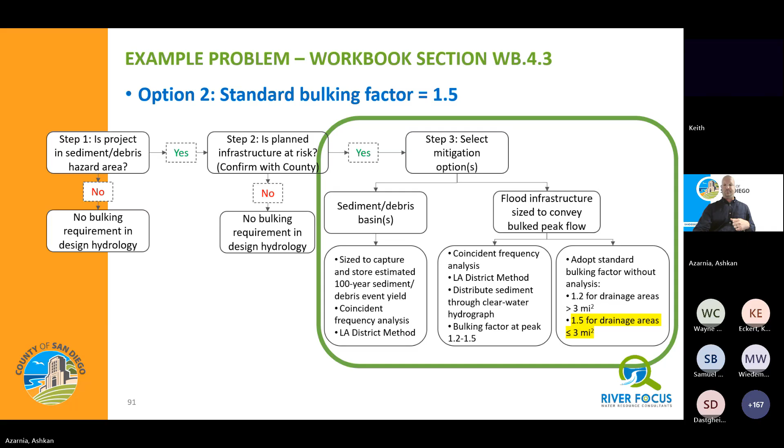All right, so just to wrap up, historically, regional sediment debris hazard mitigation has mainly occurred after damaging debris and sediment-laden flows. And this really appears to be changing as researchers and public agencies recognize the likely future impacts of increasingly frequent and intense fires and frequently intense rainfall, and begin to review and revisit policies aimed at protecting lives and safety, property, and infrastructure.

And the past decade has really seen substantial growth in post-fire hydrology and sediment debris hazard research. And like San Diego County, many other counties in the region have recently or are currently revisiting their own policies regarding these topics. So San Diego is in good company. Given the changing climate and also the pace of new research, we presented this new sediment bulking guidance as a starting point. Due to the expected changes in both the hazards themselves as well as the best practices, we do envision that the policies established based on the study will be periodically revisited and updated.

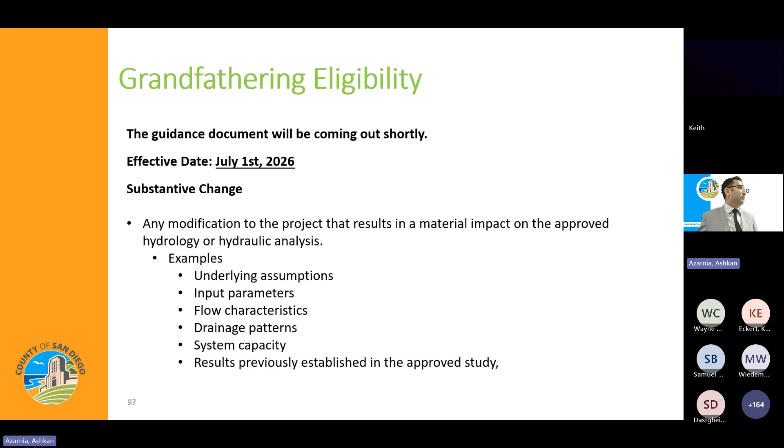So as I mentioned, the guidance document will be coming out shortly. It will be uploaded to the county flood control section website by the effective date, which is July 1st, 2026. And within this document, you will see the terminology substantive change multiple times, and I just want to clarify what it means. So any modification to the project that results in a new hydrology study, the county will consider as a substantive change. Examples are input parameters, flow characteristics, drainage patterns, or system capacities.

So in this document, generally, we categorize projects into 3 different groups, based on hydrology study submittal status. The first group is new projects, defined as projects whose first complete hydrology submittal is accepted by the county after the effective date. There is a requirement to comply with the 2026 manual. But for projects whose hydrology studies are still in review and whose complete hydrology submittal is accepted prior to the effective date, we will provide the flexibility to either proceed under the same manual version, or elect to transfer to the 2026 manual.

There will also be projects that have prior hydrology approval before the effective date. We will also have a flexible approach with those projects within the grace period. So we define a grace period of 1 year beginning from the effective date of the 2026 manual. This grace period will apply to both projects already in the review process that have a record number with the County of San Diego, and projects that previously received approval for their hydrology study and are requesting a substantive change. So we will also be flexible with those projects to either continue with the current manual version, or transfer to the new one.